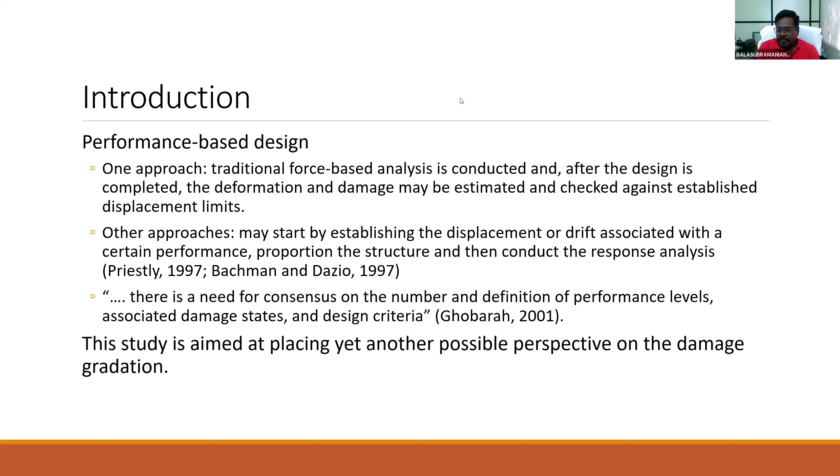In this lecture, we'll be discussing different types of damage gradation, and then apply it to the specific case of structural brick masonry buildings — whether they fit existing schemes, or whether we should go for a better one, or a newer one which is novel in its concept.

So what is damage gradation? To understand that, first we need to know what is damage state or damage grade. Damage state or damage grade is the degree of damage to an element of a building, or a building, or a typical class of buildings, or buildings within a city under consideration, due to various natural and man-made hazards. Here we will be restricting ourselves to seismic damage, and the type of building we are considering is a structural brick masonry building with a rigid diaphragm.

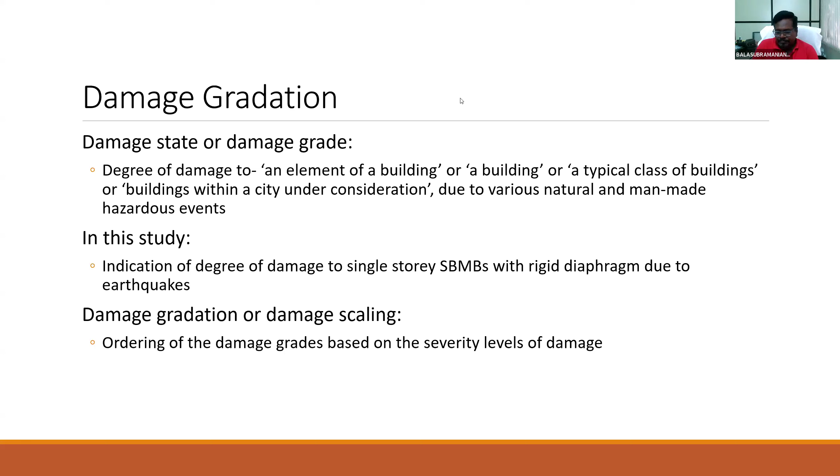So we know what is damage state. Now, what is damage gradation or scaling? If we place these damage states in either ascending or descending order and form a series, then it becomes the damage gradation. In literature, we have seen there are different damage scales or damage gradation schemes available.

Broadly, in some damage gradation schemes, they give only subjective description. In some, there are objective measures. What I mean is that terms like mild damage, significant damage, heavy damage, collapse are all measures of a subjective nature. Some damage grades talk about gradation in subjective terms alone.

On the other hand, supposing if we are mentioning 0.5 mm crack width, or volume loss, or permanent or transient drift, the story drift - all these are objective measures where you have some physical quantity to define a damage state. Similarly, we have something called damage ratio or damage factor. They also give an objective measure, but in financial terms - like cost of repair of the building divided by cost of replacement of the building. That is one way of defining damage.

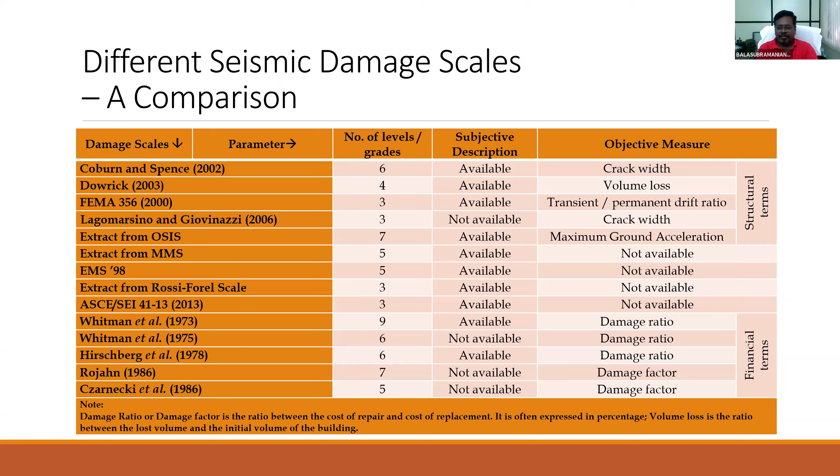So they give measures in structural terms. The other set of damage gradation talks in terms of financial terms. So what should be the interest - which are all the damage gradations that are important for what type of people? For instance, for structural engineers, the gradations that give an objective measure in structural terms will be of practical relevance. For decision makers at a district level, state level, or local body level, financial allocation and other factors come into picture, and for them, damage ratio, damage factor kind of damage gradations are of practical relevance. So for a structural engineer, we'll be very keen on those damage gradations that give damage states in structural terms - that is of practical importance.

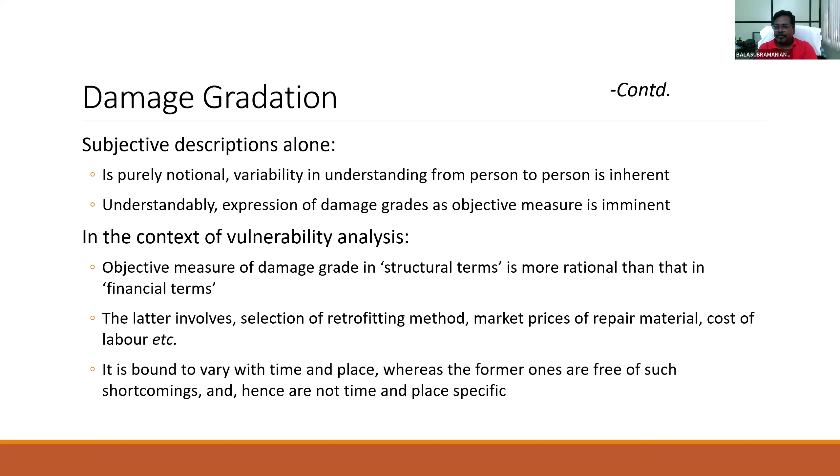And henceforth we'll be discussing that. Subjective description alone means it is purely notional, and variability in understanding from person to person is inherently built into the subjective description only. Understandably, the expression of damage grades as an objective measure becomes imminent for structural engineers. The other one, on financial terms, is relevant for decision makers.

Now, what are all the different damage state descriptive objective measures that are used in the literature? If you see, crack width, volume loss ratio, and story drift ratio. Though I have not included the maximum ground acceleration, because it's not a direct structural term. It is, as I told you already, corroborative - we can corroborate it with that.

So now, amongst these three, one can see that crack width is a localized measure. This is because along one particular weak line, the crack width may be significant, but it may not be distributed across the building, isn't it? So it may not truly reflect the overall damage on the entire building - that's why we say it doesn't truly represent the damage state properly, in an overall sense.

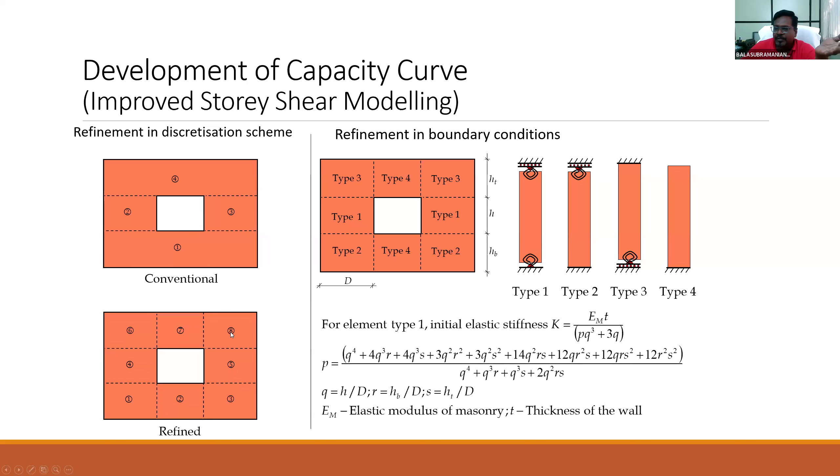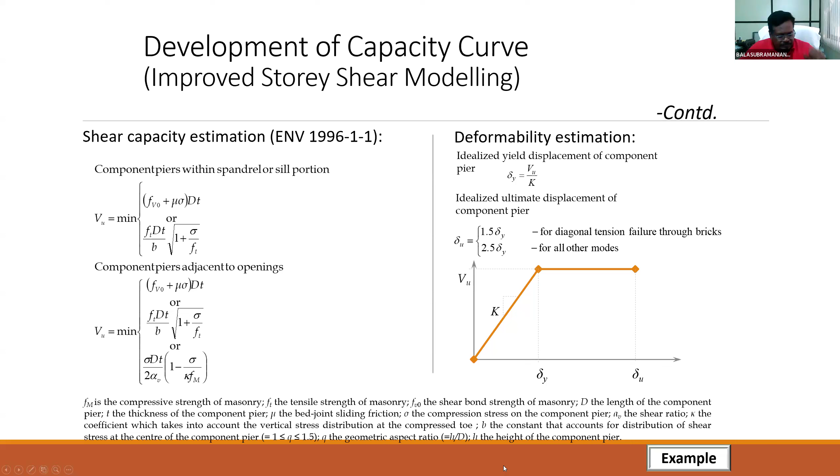For each and every one of these component piers—1, 2, 3, 4, 5—we can get the capacity curves. And then what we can do is get the capacity curve of the building through an assembly procedure, which I will explain.

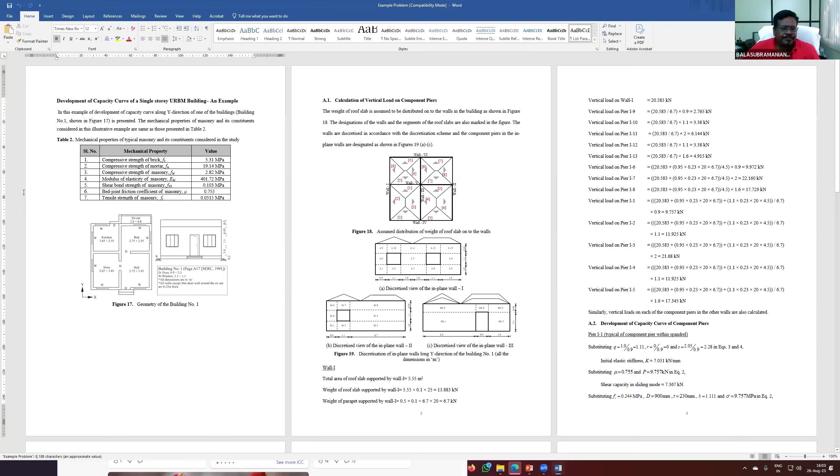Is it visible? Yes, sir, yes, sir, it is visible.

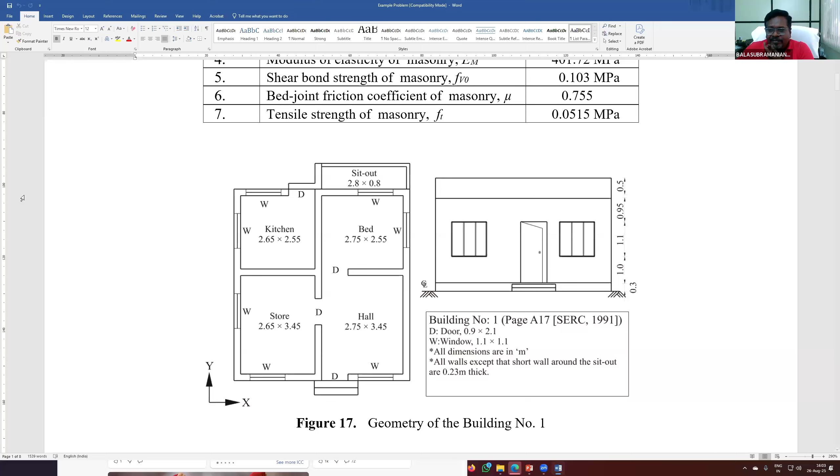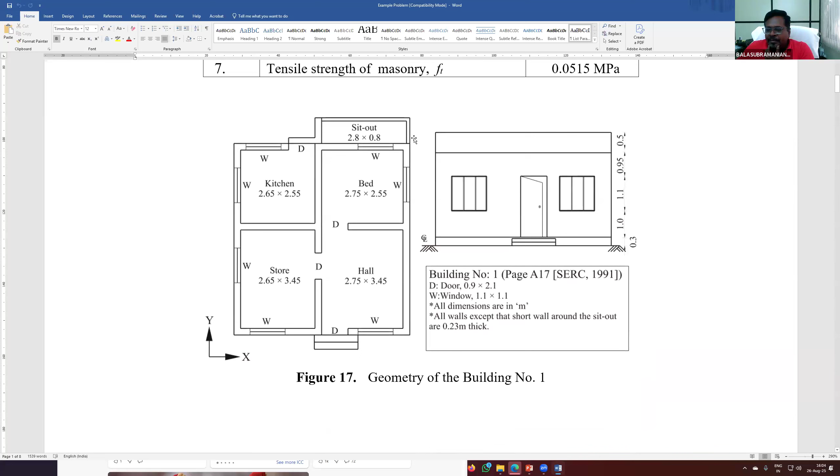Now I'll show you an example problem to understand this in improved story shear modeling. In this building, there are two principal directions, X and Y. Along X, we have 3 walls running in the X direction, and we have 3 walls running in the Y direction. So we'll talk about how to get the capacity curve of the building along these two principal directions.

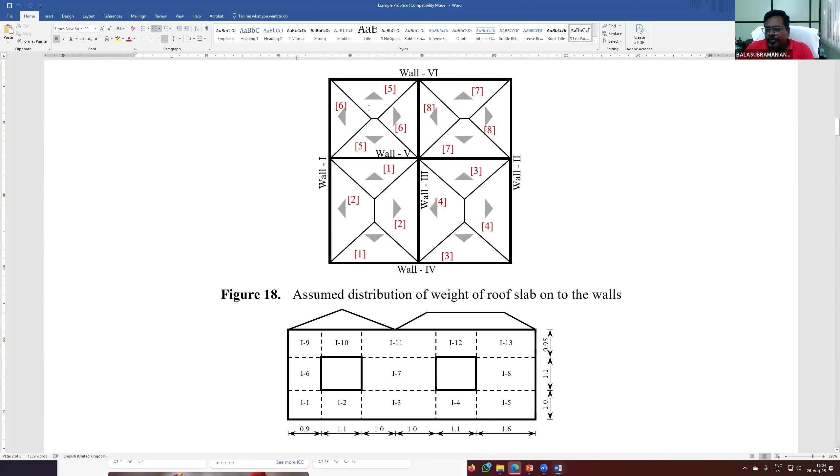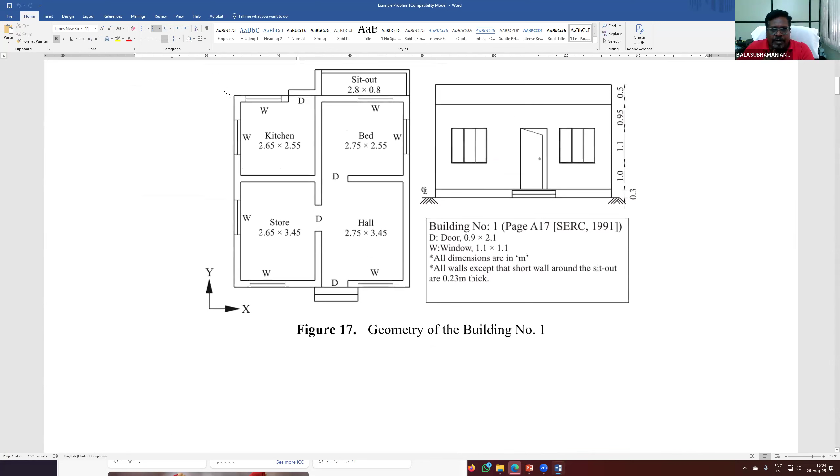Now this is the roof part, and you all know how the load from the roof can be distributed onto the walls. Using this, we get the load distribution on one particular wall—this is wall 1, wall 2, and wall 3.

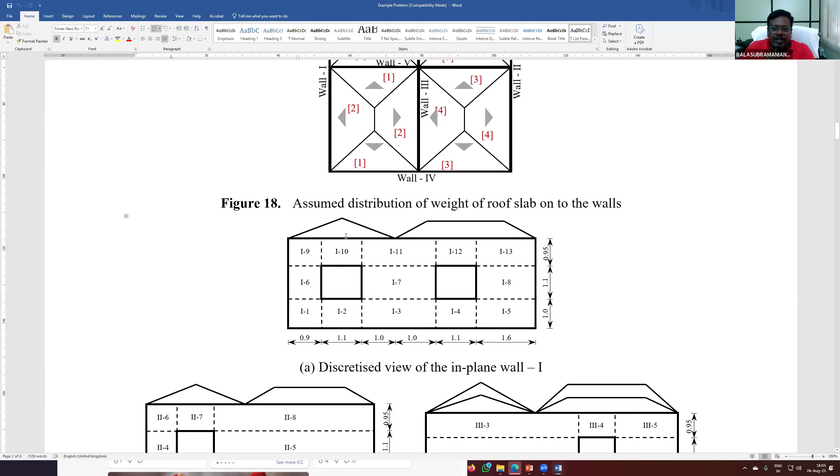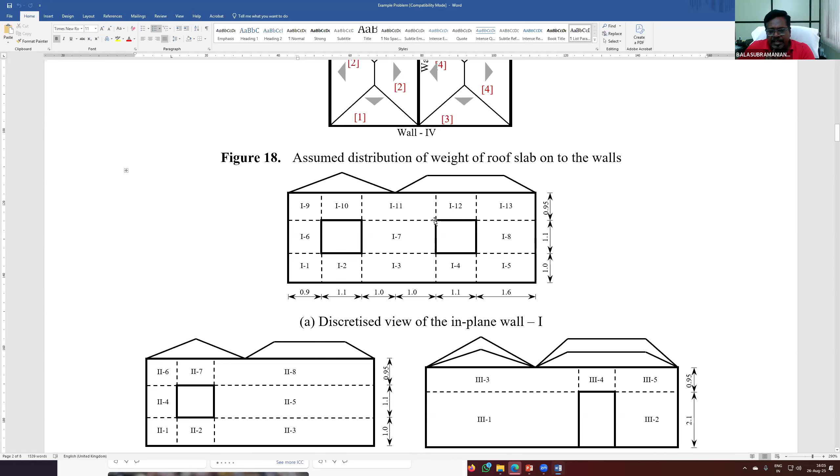From the top portion, it is showing the load distribution as a UDL—uniformly varying or constant, a uniformly distributed load. In this case, we have 13 component piers. For all these 13 component piers, we can get the capacity curve, one for each and every one. In this wall, we have 3 levels: in the sill portion there are 5 constituent piers, in the pier portion there are 3 constituent piers, and in the spandrel there are 5 constituent piers.

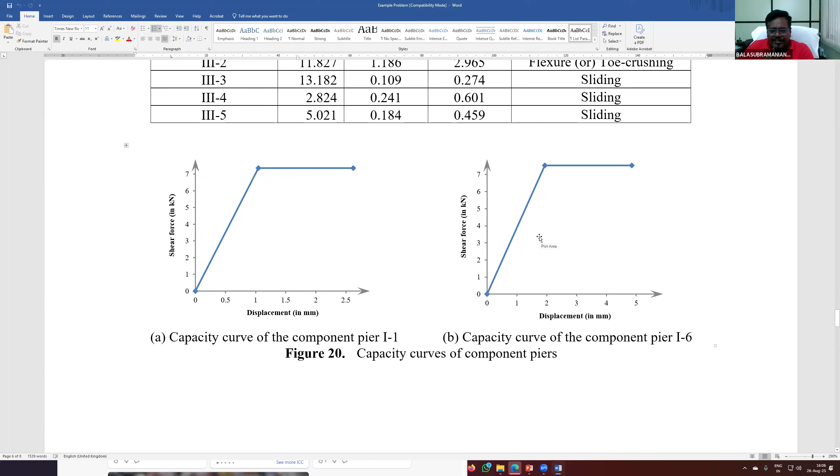So we'll talk about this wall alone, and then we'll proceed. Now look at this—this is component pier I-1's capacity curve. Similarly, this is component pier I-6's capacity curve, because they are identical, and they have shown it.

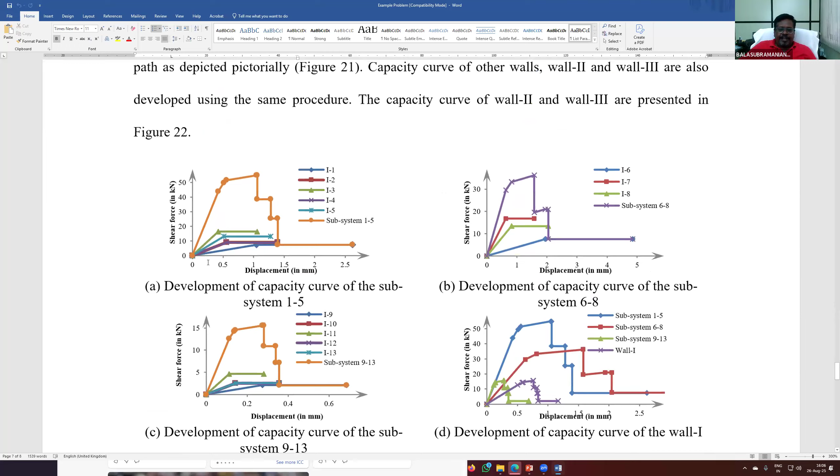I told you that in that wall there were 5 component piers in subsystem 1, that is the sill. These are the capacity curves—the small lines here—they are the capacity curves of the individual component piers. Understand?

We have this capacity force. We have this initial stiffness from the intercept point—the x-intercept point is the displacement delta y, the yield point displacement, multiplied by the ductility factor, you will get delta u. So we have a bilinear capacity curve. We can obtain this for all the components.

In subsystems 1 to 5, there are 5, and they are represented here. So now this subsystem resists force in parallel action, because it's like having 5 springs resisting the force in parallel. So what happens? The force gets added up—the resistance of 1 plus the resistance of 2 plus resistance of 3 plus resistance of 4 plus resistance of 5 will be the resistance of the composite system 1 to 5, isn't it?

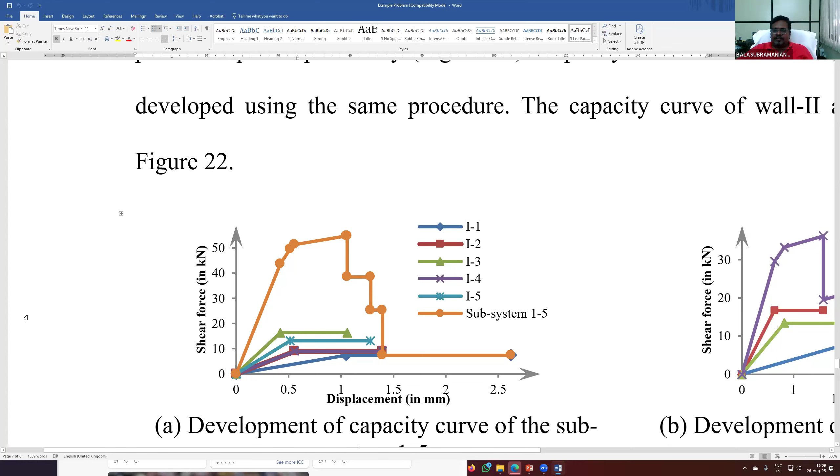If you algebraically add these force values, we will get the envelope capacity curve of the subsystem, which is shown in that orange color with the circular marker.

Similarly, in the middle portion there were 3 components—6, 7, and 8. They are also parallel springs; they also resist force in parallel action, and they are separated apart. In this case, diagonal tension, sliding shear, as well as rocking mode have to be considered, to get the capacity curves of these component piers 6, 7, and 8. That is shown in the figure for 6, 7, and 8.

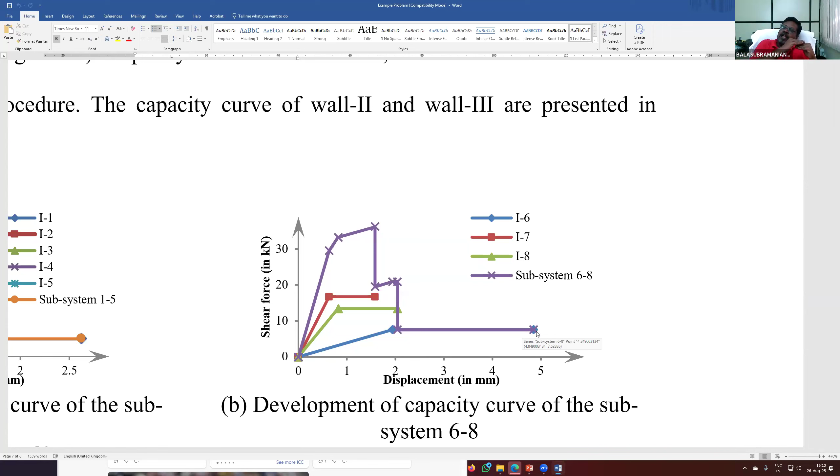As these are also resisting force in parallel action, we can algebraically add the force resistance levels at each and every displacement level to get this composite capacity curve of the subsystem, shown in that purple or violet color with an X marker—because force is resisted in parallel action, so you add up the forces. Similarly, in the top portion there were 5 component piers, also resisting force in parallel action, and their composite capacity curve is also shown in orange color with a circular mark. Just by adding the resistance levels, we'll get the overall capacity curve.

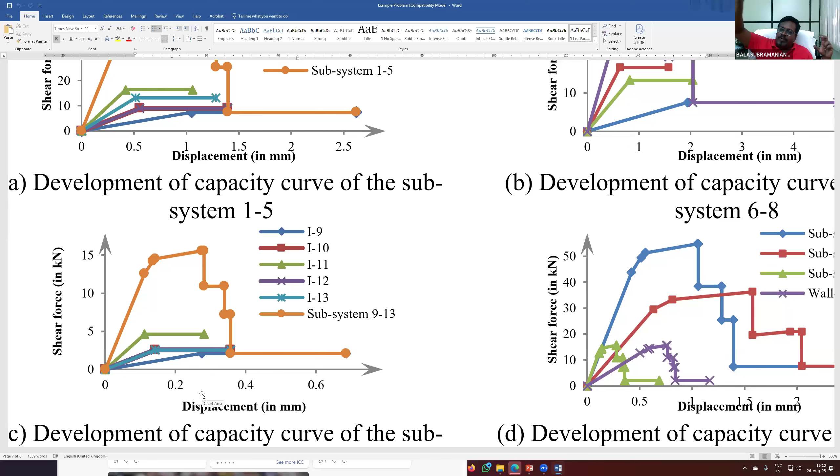So now we have the capacity curve of components 1 to 5, the capacity curve of 6 to 8, and the capacity curve of 9 to 13.

So this is here 1 to 5, 6 to 8, and 9 to 13. Now these subsystems are resisting force in series or resisting displacements in parallel. Subsystem 1 is the sill portion, above that subsystem 2 is the pier portion, and then subsystem 3 is the spandrel. So this is in series action, resisting force in series action.

On the other hand, what we can say is resisting displacement in parallel action. So what we'll have to do is add these displacements for each and every level of displacement, each and every level of force. What will be the overall displacement that we can obtain by adding the displacements of the component piers?

Something like this, from left to right. Add the displacement values from the green one. This violet color one is separated farther apart, right? This is after adding the displacement corresponding to that blue and brown one.

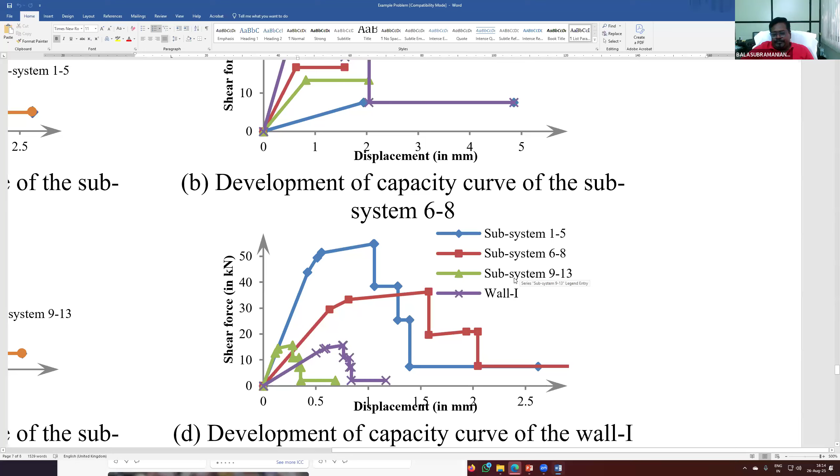Here it is getting separated. The top portion, that is getting separated. That is the scenario, because in that level, 9 to 13, all these component piers are sliding critical, and also that is the weakest one.

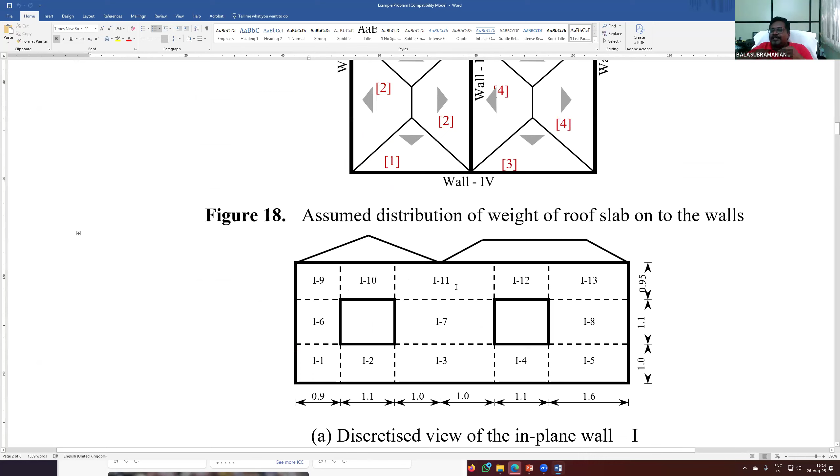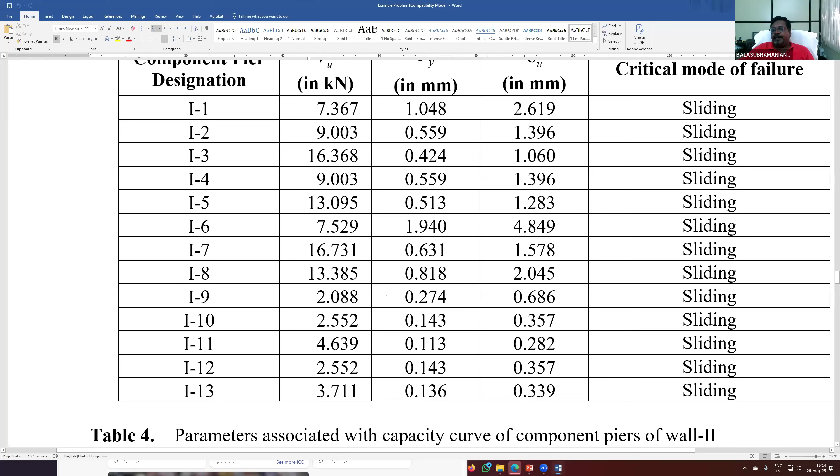So in that building, in that wall, the top portion is getting separated and moving away. That is above the lintel. See this discretized wall 1. This entire wall above the spandrel, 9 to 10, 9 to 13, they get separated in the sliding mode. So that is the type of behavior that we are assessing by developing this capacity curve, and while we do that, we are obtaining this pattern.

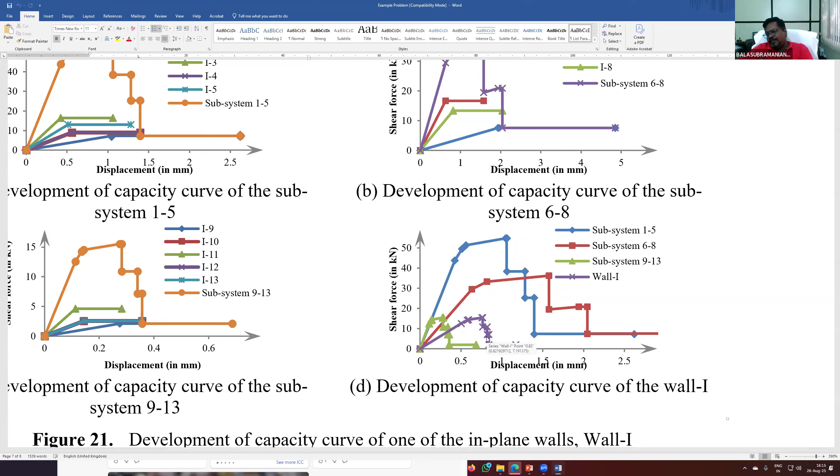Okay, so now we have got wall 1's capacity curve, which is the violet one. Along the y direction, we saw there were 3 walls, wall 1, wall 2, wall 3. In the same way, we can get the capacity curves of wall 2 and wall 3 also, using the same procedure what we adopted.

And then to obtain the capacity curve of a building, again we'll have to go back to the resisting force in parallel action scheme, because wall 1, wall 2, wall 3 are parallel springs. They are composite springs by themselves. Wall 1 is a composite spring by itself, wall 2 is a composite spring by itself, and wall 3 is a composite spring by itself.

And these three springs, wall 1, wall 2, wall 3, are resisting force in parallel action. For this also, we will have to add the resistance and follow the same principle what we adopted for the case of spandrel or sill. Now you see there are 3 lines, that is for wall 1 blue color, wall 2 red and brown color, and wall 3 green color. And for the building, they resist force in parallel action, and so the resistance are added at each and every level, and the total capacity curve is obtained.

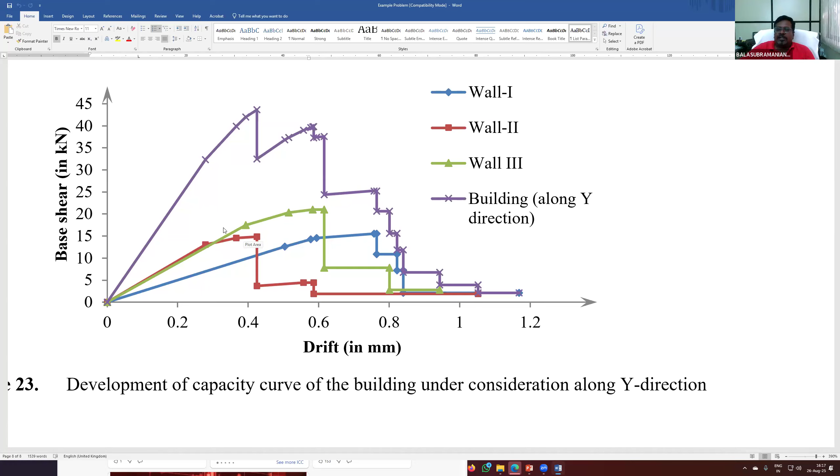So what we are seeing, it keeps on increasing, and then we realize that the red one starts getting into the nonlinear range, and then the next stage is attained in the same red color one, that is wall 2, something like that, for each and every point of direction changing. You have to obtain the ordinate and then connect them to get the capacity curve of the building. So this is the way how we get the capacity curve of one building along one principal direction. So this procedure we adopt to get the capacity curve of buildings.

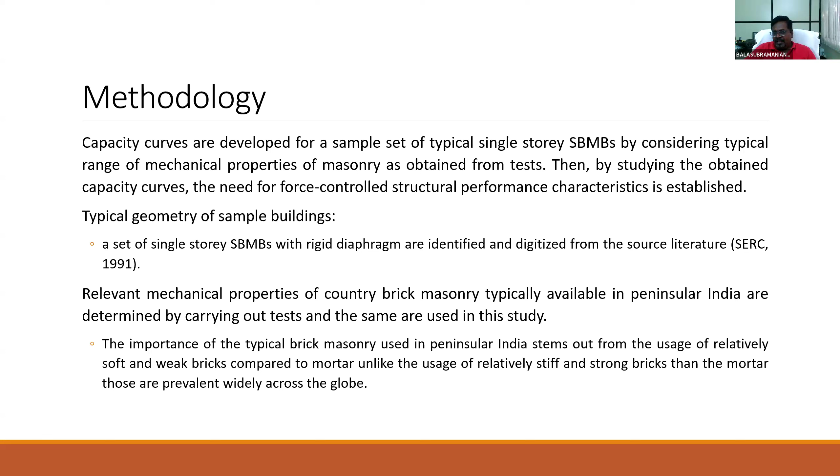So for the 35 buildings we are considering, we will have 70 capacity curves. For the same building, along x direction and y direction, we'll have a distinct, totally different capacity curve. Resistance also will be different, and the displacement, ductility levels are also different.

How to classify them? How to understand them? How to bring some kind of a judgment, define the measure, and then grade them? That is the point, isn't it?

As I told you, in FEMA we had this drift ratio, fixed value of drift ratio. And then they went into the deformation controlled drift ratio limits - drift ratio fixed values, and deformation control drift ratio limits.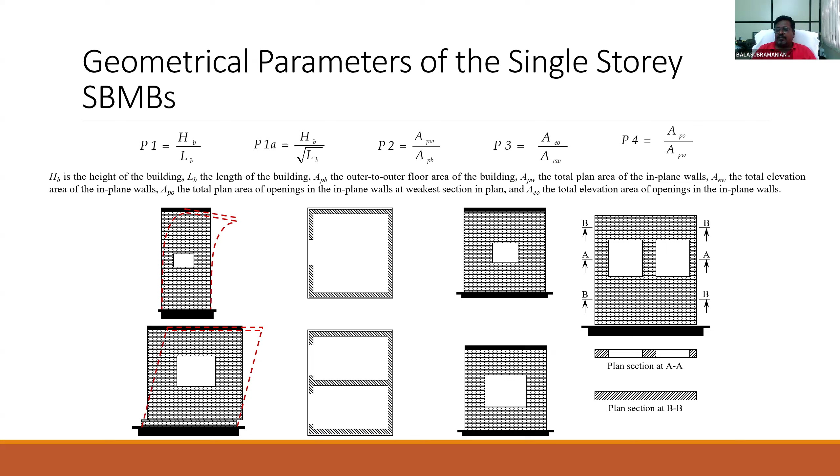But depending upon the geometry, variation in the geometry, and the locations of the piers, you will get a lot of scatter. In these 35 buildings, these are all the geometrical parameters we have considered. In the right column, we have shown the coefficient of variation in their statistical values - all these are showing significant dispersion.

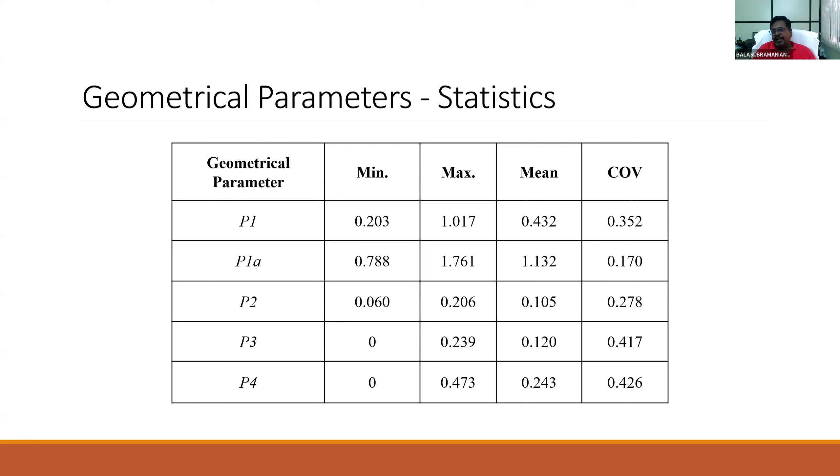That means the buildings we have considered are not a very narrowed down class. It is one type of building, but the scatter indicates that it is an overall representative, good representative of typical structural brick masonry buildings, low-rise structural brick masonry buildings with rigid height. So this COV value is showing us that this is a fairly representative sample.

And now the main part. I told you we have considered 35 buildings, and for each and every building there will be 2 principal directions, so we have 2 capacity curves. These are the capacity curves along 2 principal directions of those identified 35 buildings.

Now you can see the capacity curves. All of them are single-story buildings, all having similar sizes and geometries, but their positions of openings, sizes of openings, number of rooms - these are all only different. But see, the capacity curve is showing a large variation, right from 20 kilonewton to 160 kilonewton.

And from say 0.02% to 0.2% - such a large scatter, both in capacity ordinate and also in the drift ratio ordinate. And importantly, the drift ratios are also significantly varying.

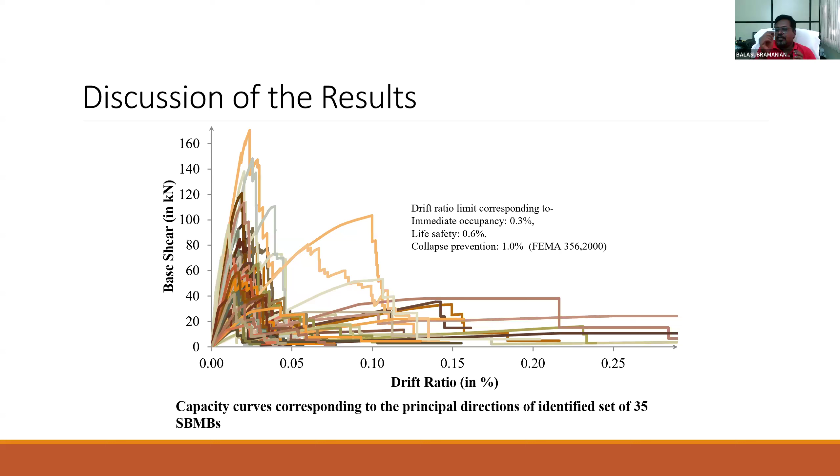So to define a damage grade, the ductility ratio cannot be used. Or ductility, or the measure which is controlled by what they call the deformation-controlled drift ratio limit - that also is not possible. And so we come out with the structural performance characteristics based damage gradation.

So what damage grade 1 means is the earlier of initiation of non-linearity in any of the component piers, or attainment of 33% of base shear in the rising limb. What is that? Either some part of the building is getting into non-linearity. I told you, from the development of capacity curve, we would have realized that the non-linearity is happening progressively, component by component. So whichever component attains non-linearity first, that is damage grade 1.

If supposing the level happens just before attainment of peak or very close to peak, will it be acceptable? No, right? So what we are saying is, when they are not so close, and when they are so close - initiation of non-linearity and attainment of peak base shear happening at closer spacing - what we have to do is bring the damage grade down to 1/3 of the attainment of peak base shear. So in a capacity curve, we will get the damage grade 1 marked down, and then attainment of peak base shear.

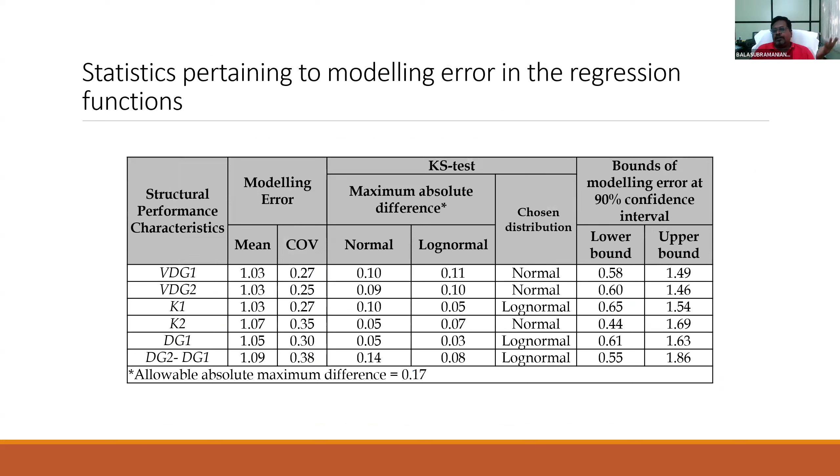So this is the concept that we have brought in, and then all the other things, or further details on how we have given justification, all that - as we are also running out of time, I have crossed 5 minutes beyond the given limit, so I will stop here.

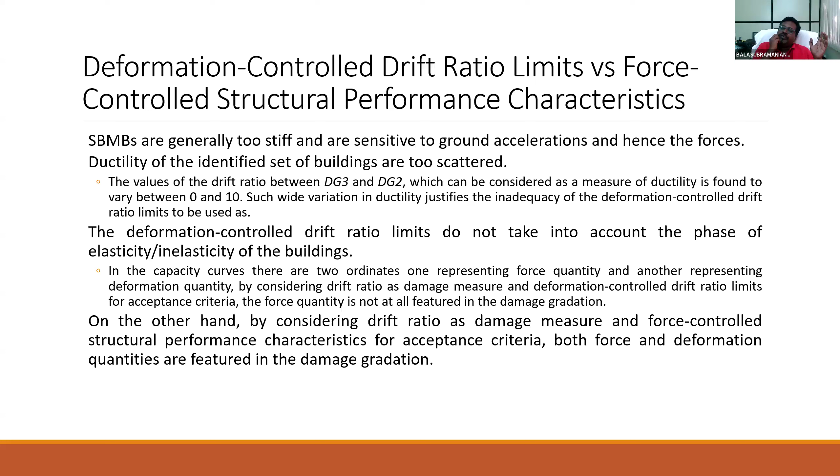But this is available in a paper which we can refer to - a detailed description, a detailed method of assessing why and what, how to corroborate all that we have carried out to give the justification, and end up in this damage gradation, the structural performance based damage gradation. So this is the topic I wanted to cover.

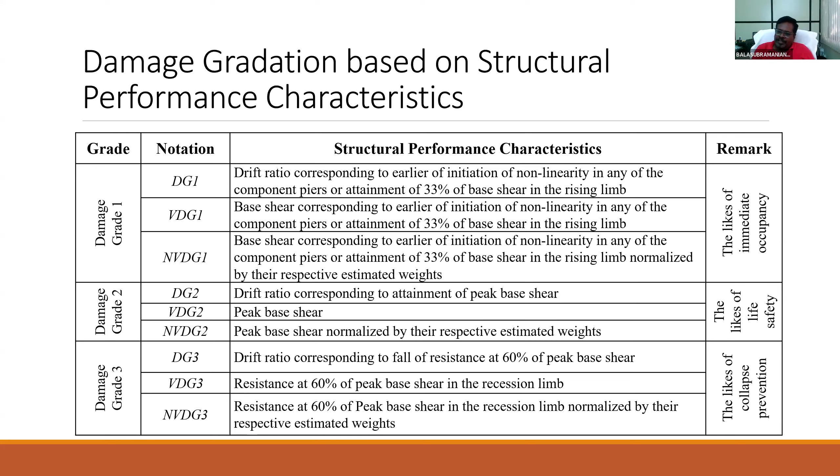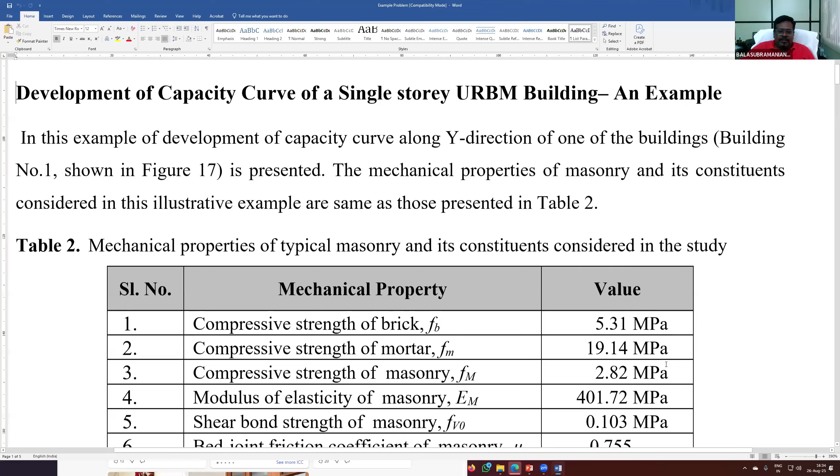So what we can do is get the capacity curve. From that, what we can obtain is the drift ratios for that particular building. Giving fixed ratios for the entire class of buildings is not correct, but for the respective building, we can get the drift ratios corresponding to damage grade 1, 2, and 3. Supposing if you consider this particular case - okay, the example problem, I think it is given in that Word file - we will go to that example problem.

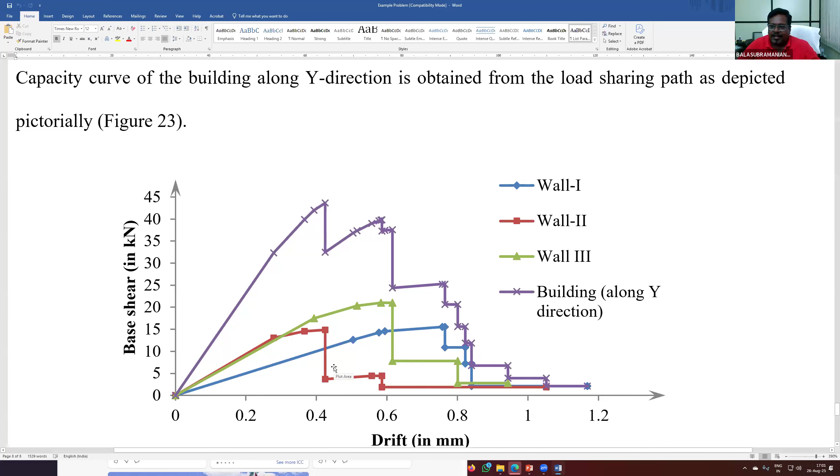So the last question of the day: in our discussion and presentation we have used two terms constantly, pier and spandrel, with reference to a masonry wall. Could you please clarify for the audience what exactly pier and spandrel are all about? Many of these students are not aware of these masonry-specific terminologies. I'll show you something.

No, maybe with that in your slide as well, where you have shown a wall where there was an opening. So, dear friends, are you able to see this? Anybody else? No, sir. Everyone is able to see. I just wanted confirmation from others. Yeah, sure, anyone can respond please, whether you are able to see the slide or not. Yes, sir, we can. Thank you.